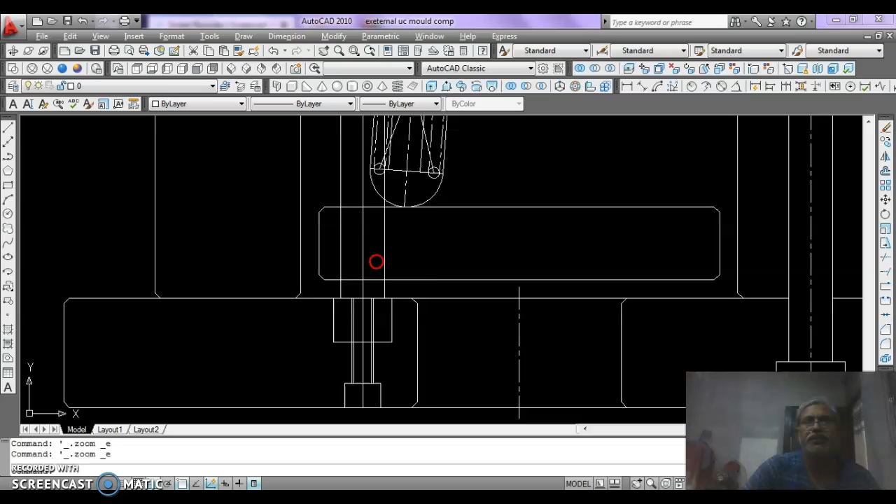Continuing our discussion on external undercut mold, we are trying the screw here to lock the ejector guide. We just trim these two lines here.

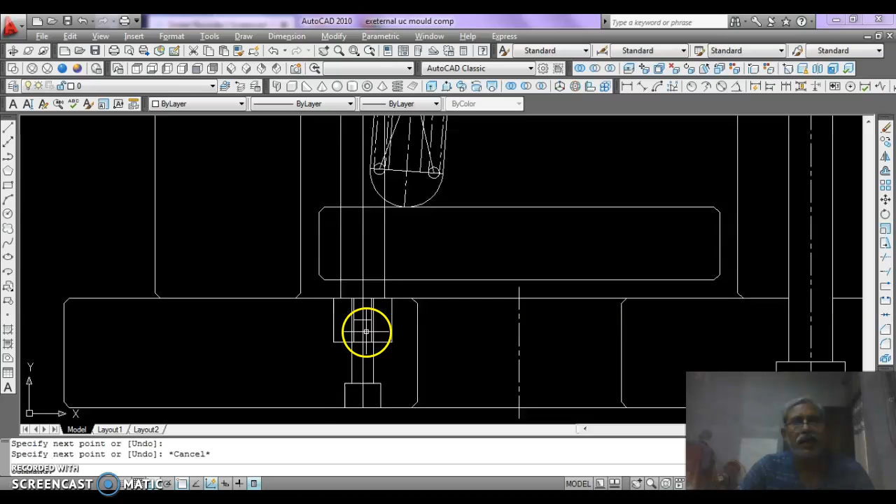Draw a line here, mid to mid, mid to mid here, and it should be moved 5 mm upward. Then F enter, sorry Control Z, F enter, R enter, 0 enter.

Use fillet between these two lines. Now offset this line by 3 mm upward, and then again F enter and draw fillets to join the corners.

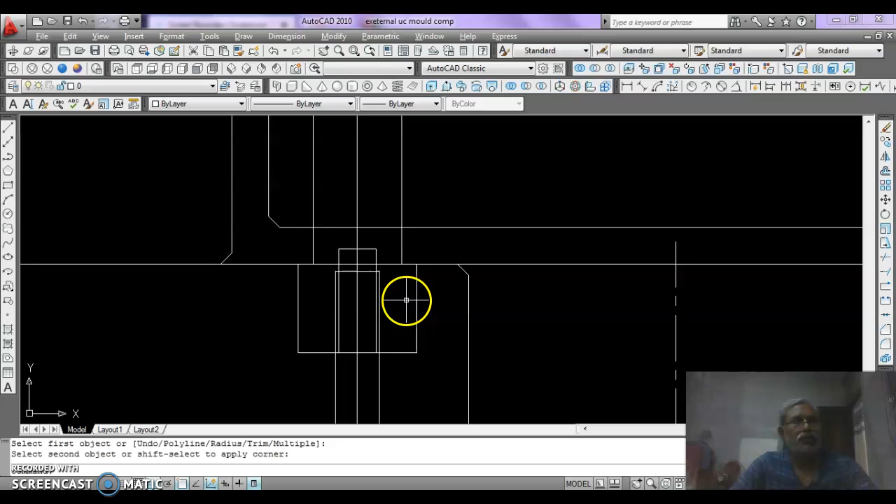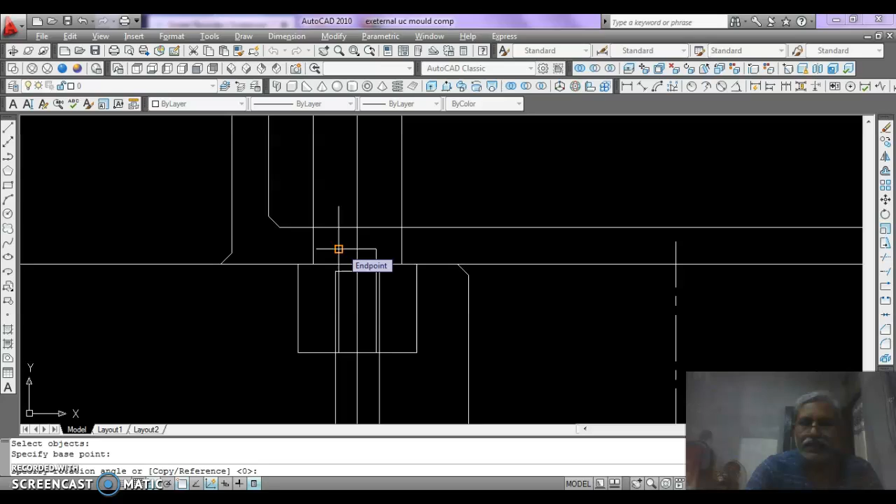Now draw a line here and rotate it by minus 39 degree, sorry, 34 degree, 64 degree.

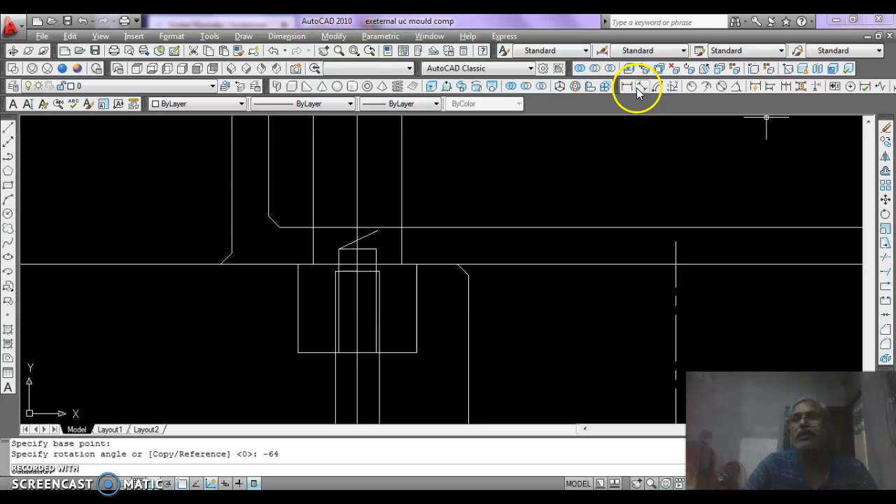As 4 degree is tilted 4 degree, we can check this, the angle should be 30. It is 26 degree here, we need 30 degree, so we rotate it again by 4 degree, and now it is 30 degree.

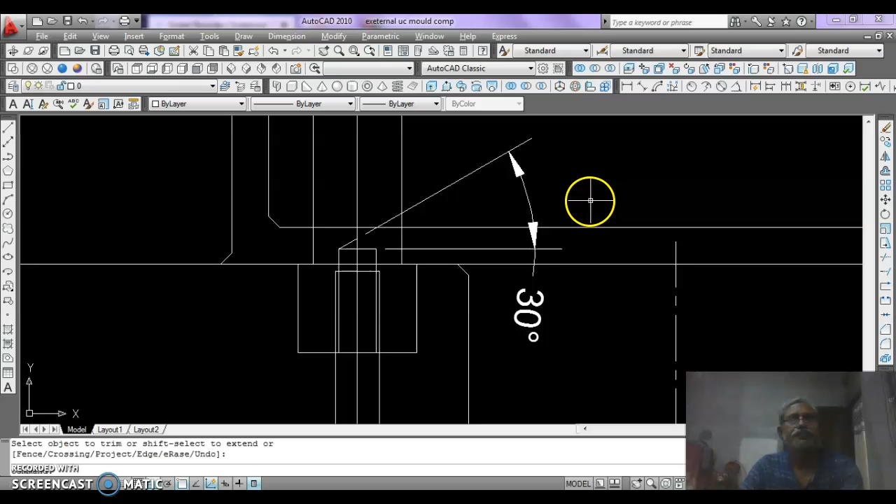Now trim the line on this center line and erase the angle. Now draw a line from end of this and end of this.

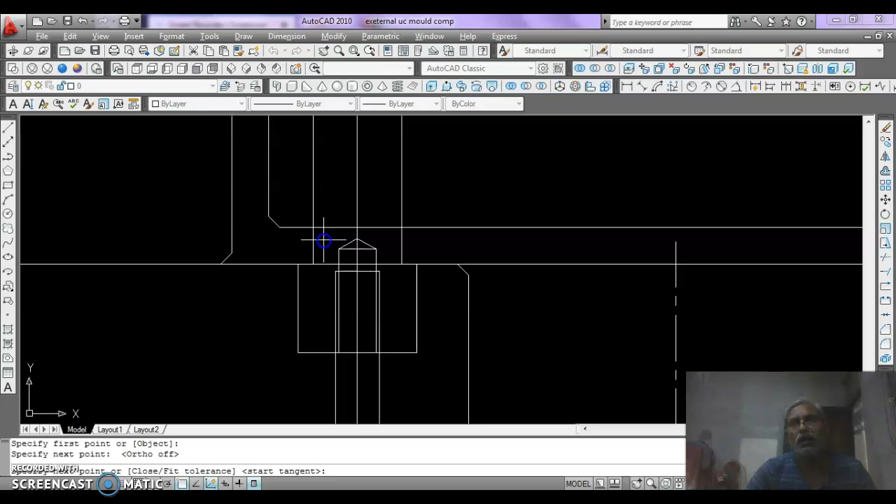Now we just draw a spline here using ortho, and then trim.

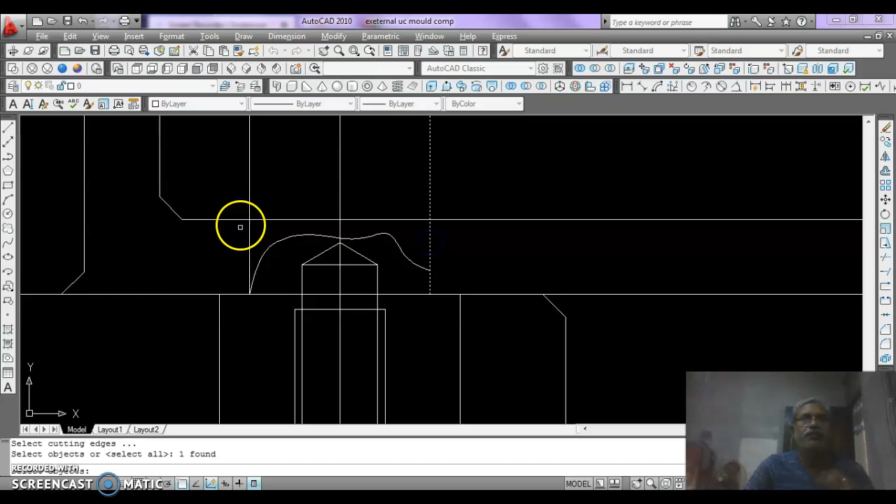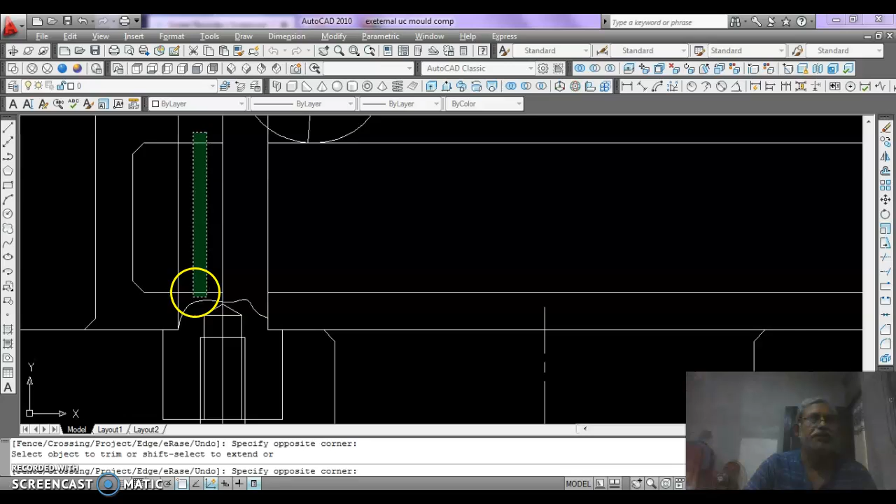On these two lines, this line. Now we can also trim these two lines and these two lines. We can also make a bush here.

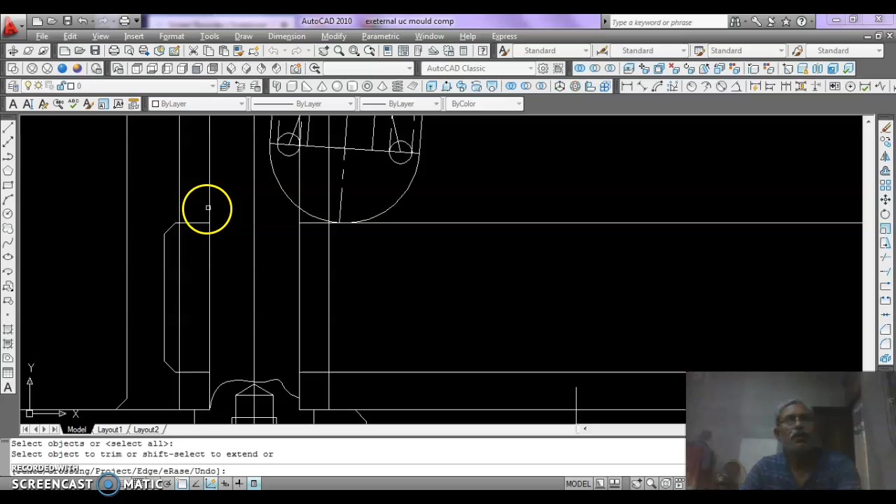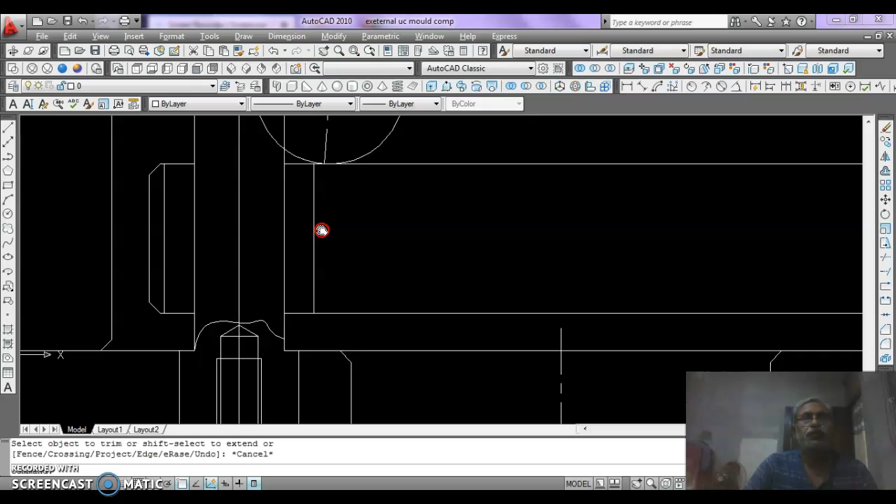Offsetting by 4 mm this line rightward and this line leftward. Trim these two lines on these two lines, this and this also. This is the bush we need to travel the ejector assembly.

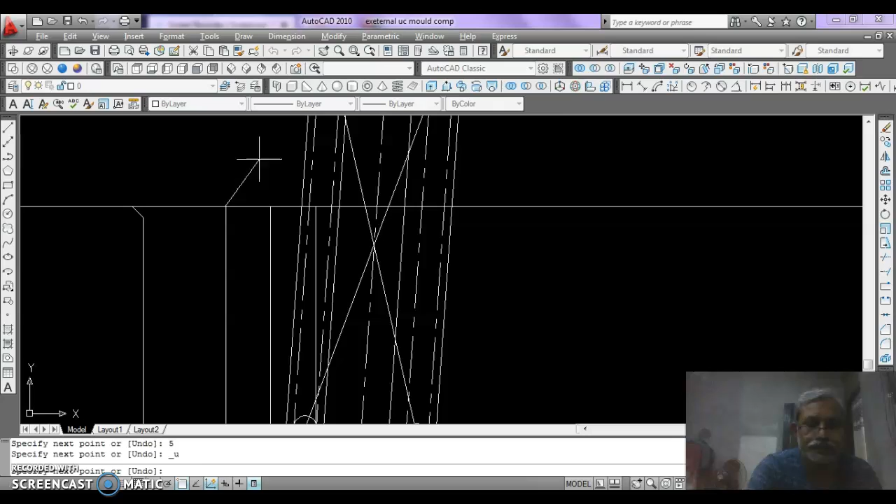With this pillar, and this pillar should be 5 mm inside, ortho should be on. Five mm and then 12 mm and then join with this.

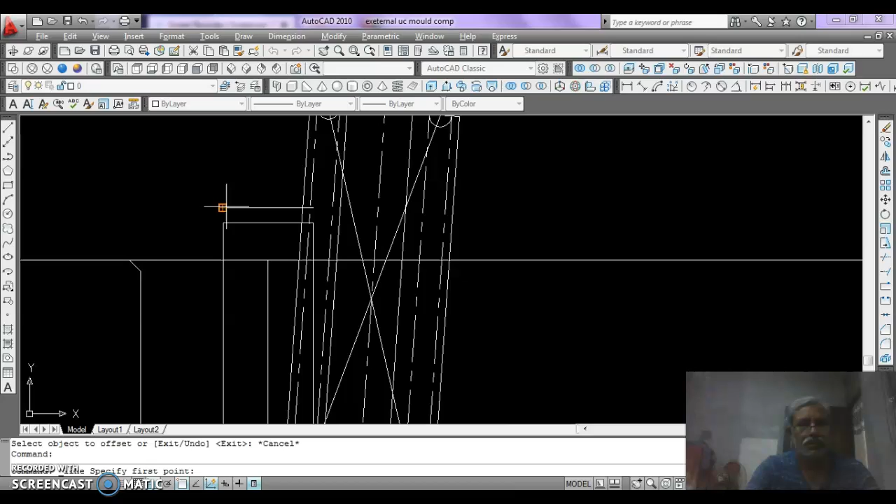Here also we need offset by 2 mm upward the depth of taper at the rate of 10 mm, angle 30 degree.

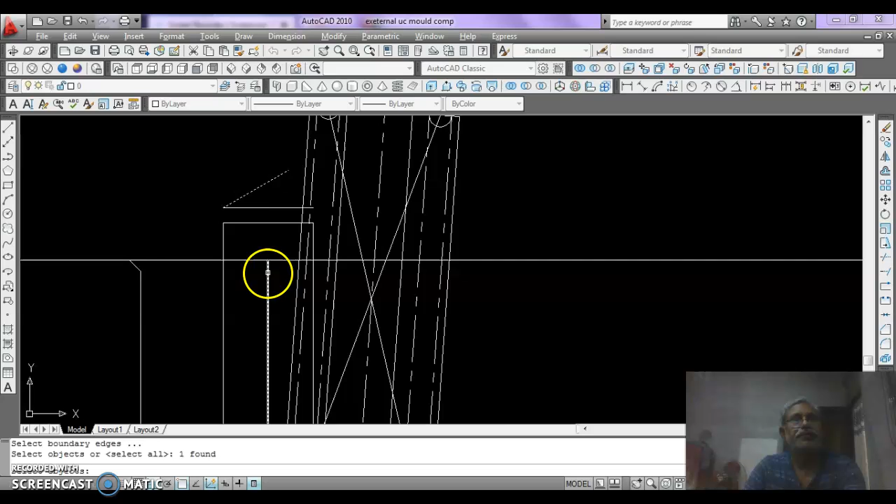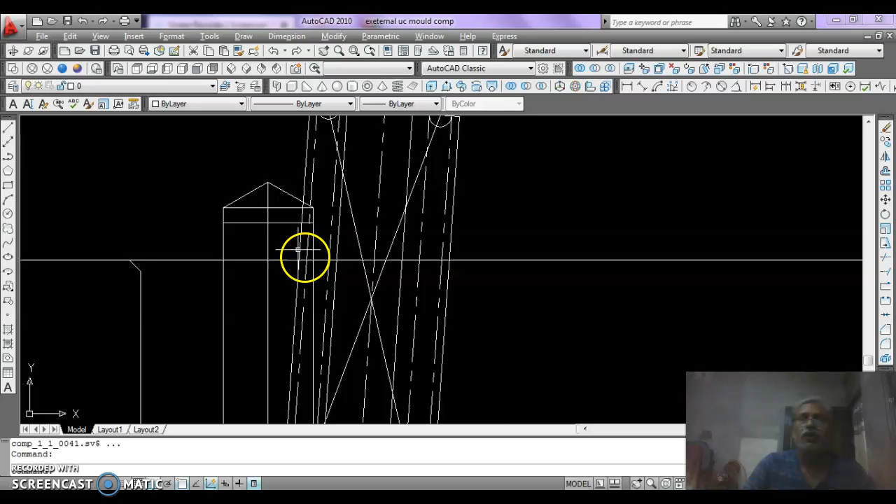And then extend this line to this line and then trim it. Now draw a line from here to here. Enter these two lines to be extended to this line, and now the pillar is fixed in between the two plates.

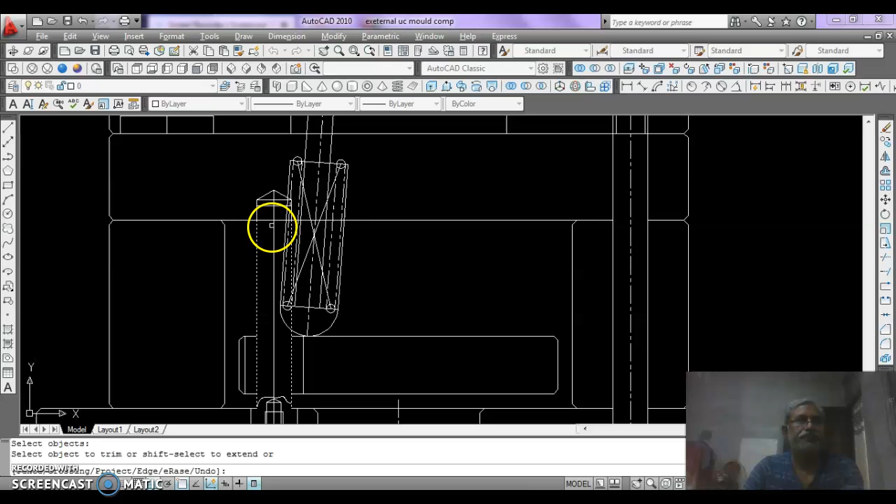This line be trimmed in between these two lines, and these are 4 pillars, so we may mirror it the whole

System in the center.

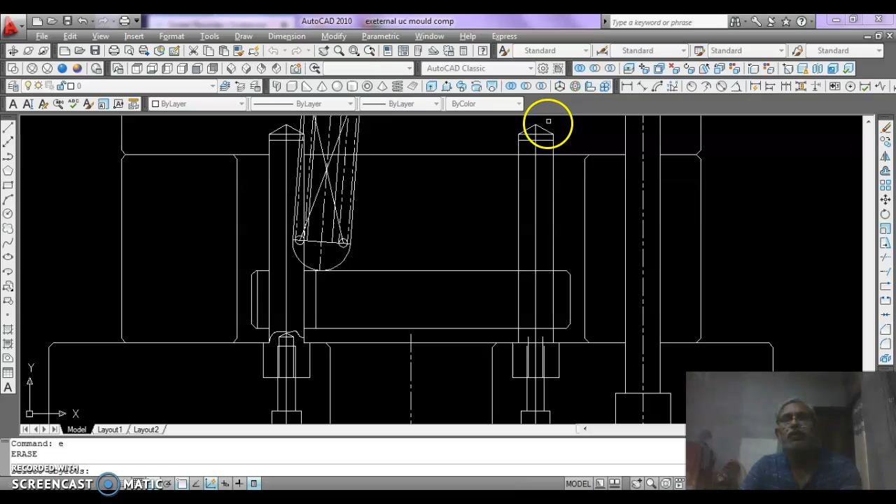And this is not visible, so may be erased, and this also not visible. We can erase this whole system except this line. This is the center line and not to be erased.

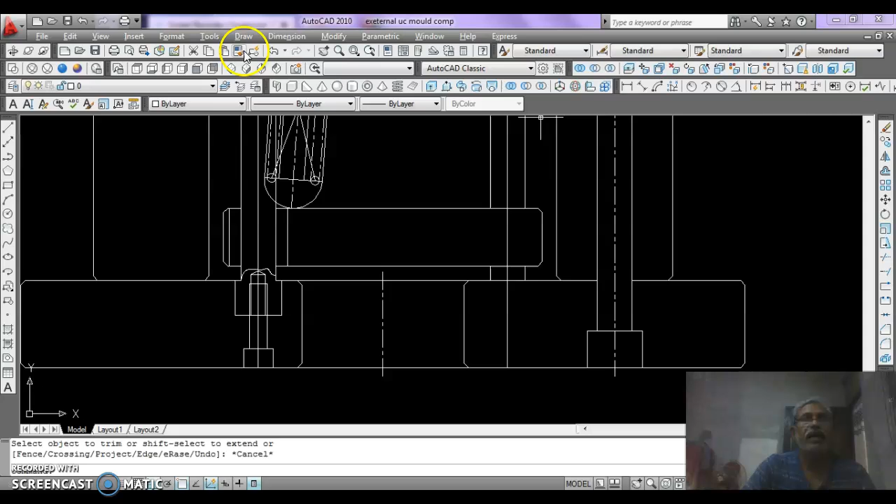Also trim this line in between two lines and match property. With the help of match property, this center line to this center line.

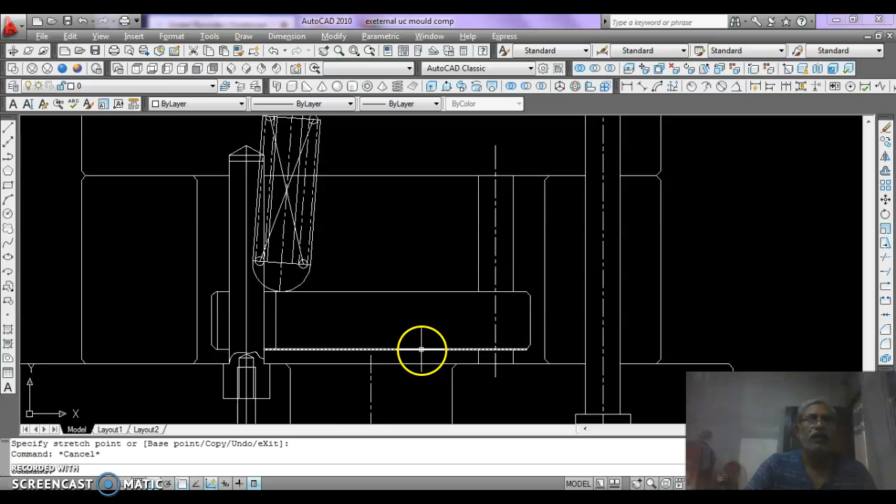Now this line we dragged close to the pin, and now the ejector assembly is running well.

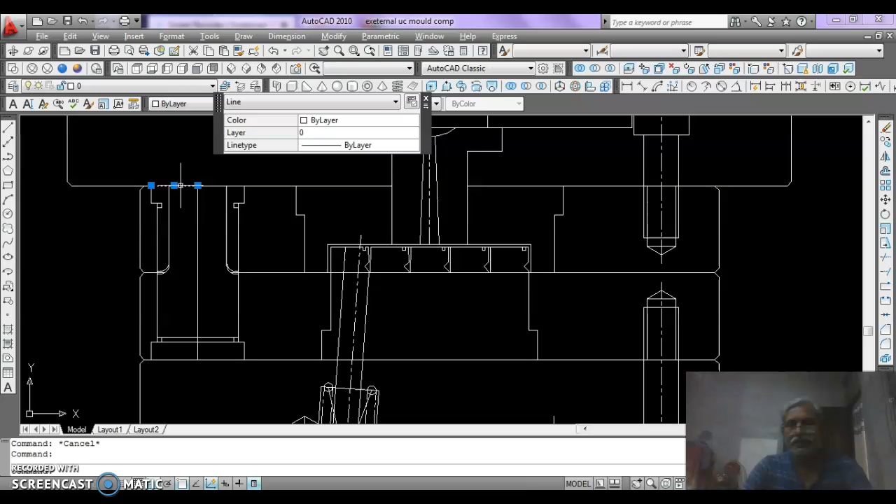Make fillet with 0 radius in between these two lines. Now draw a line. Now offset it by 8 mm downward and then draw a line at the rate of 18.

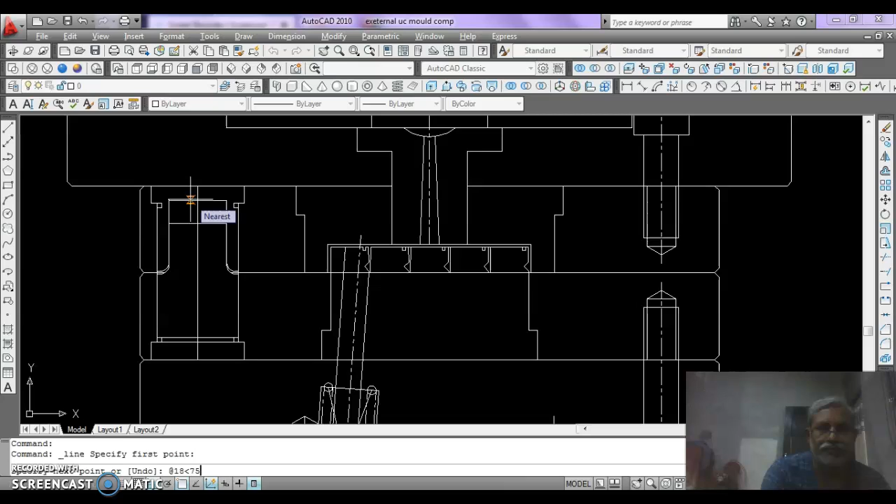Angle 30, not 30, 75, and then F enter, R enter, 2 enter. Here is the 2 mm radius, and then mirror these two

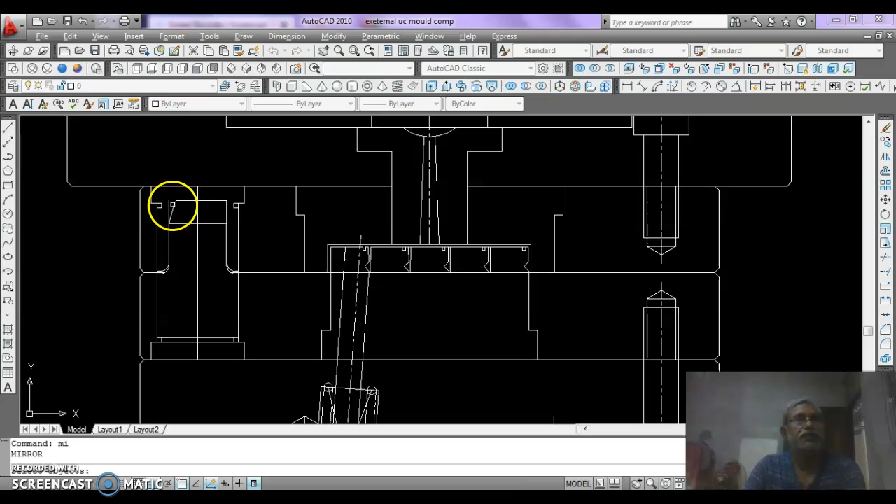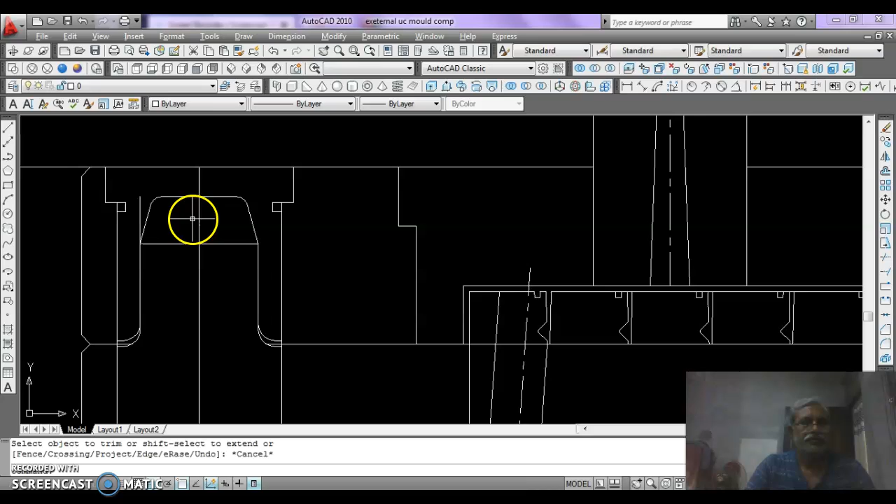At this line, and then trim. Sorry, this is not to be trimmed, this can be extended to the upper line.

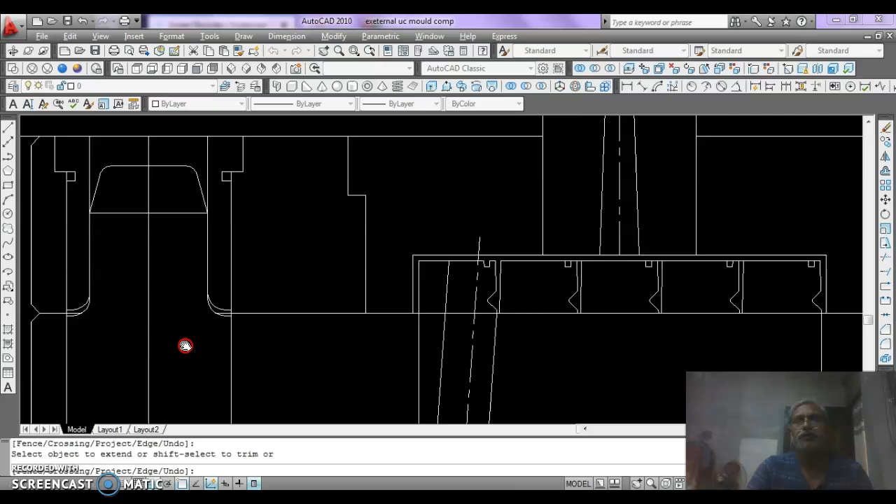Now guide pillar and guide bush is ready to work. Now here we need a

Screw at the distance of 50 and till this line, and then delete this line and draw another line here to here by 6.75.

Then 8.5, then now offset this line by 4 mm and then trim these two lines each other.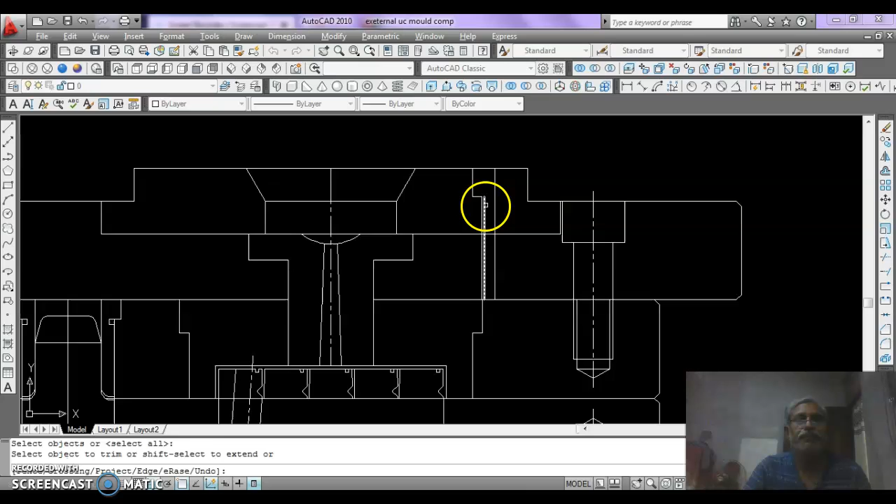As cutting edge. Now offset this line by 0.75 inside and then trim it and then mirror it another side.

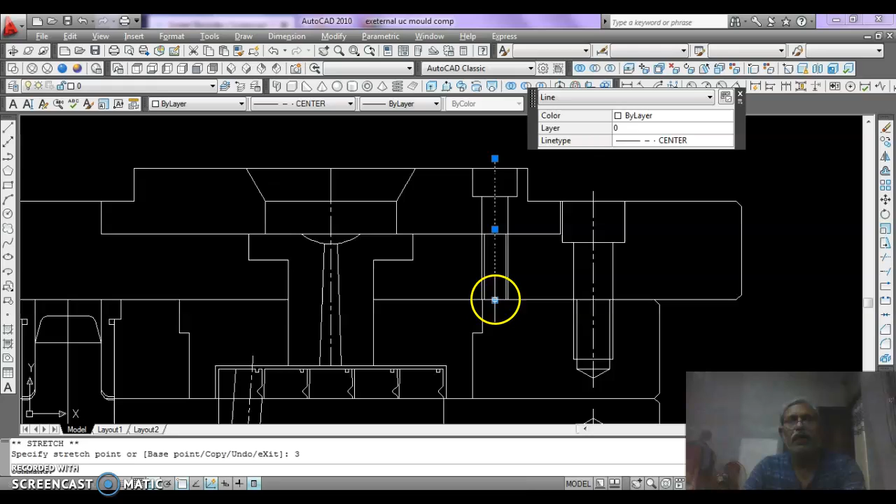Then join both these lines in single line, then match properly the center line of this screw and extend this center line by 3 mm upward and 3 mm downward. It can also be extended 3 mm upward and 3 mm downward. We can join these lines each other.

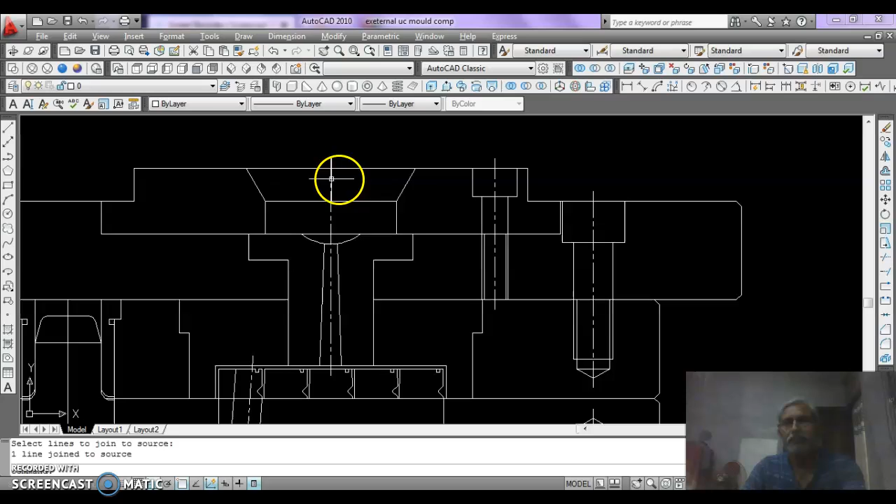Now the screw bush also ready. Now we have to go in the plan to draw this pin in the plan.

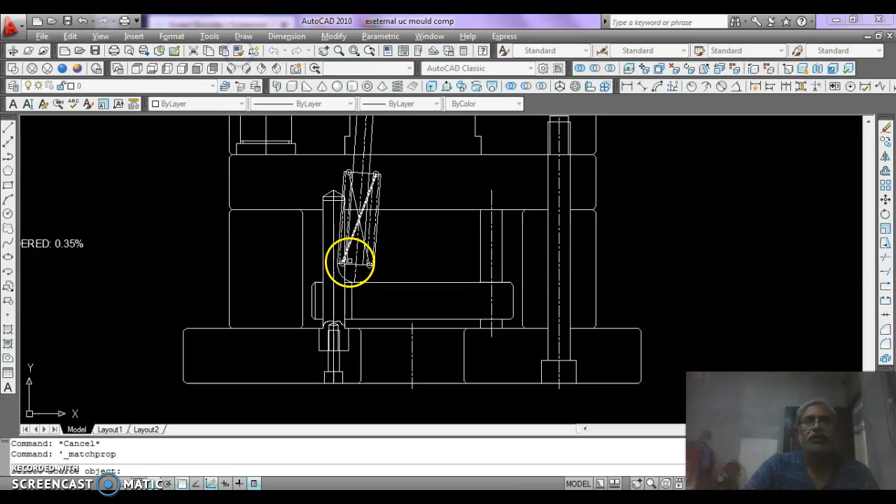These pillars also be drawn and their center line be converted into center line property. This is also, and then this can be dragged by 3 mm downward and upward.

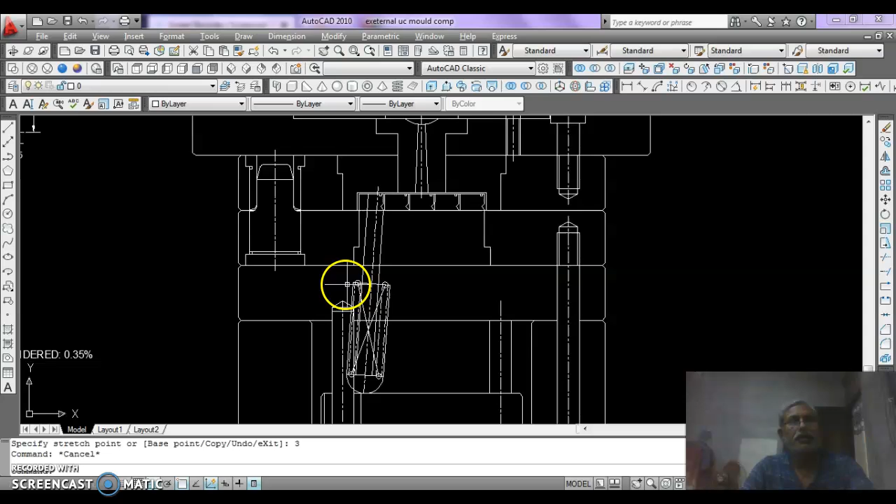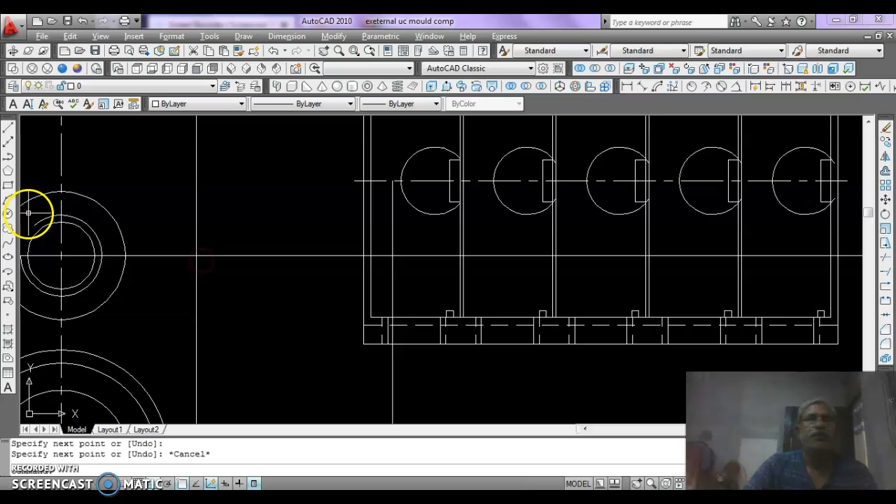Now we have to draw some line here. This is the head of this line and we have to draw an ellipse here using this center by 12 mm, 20 mm.

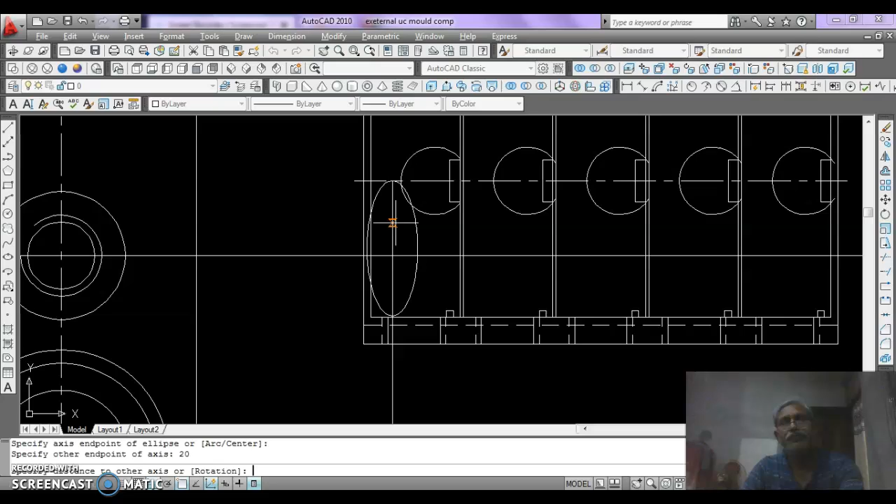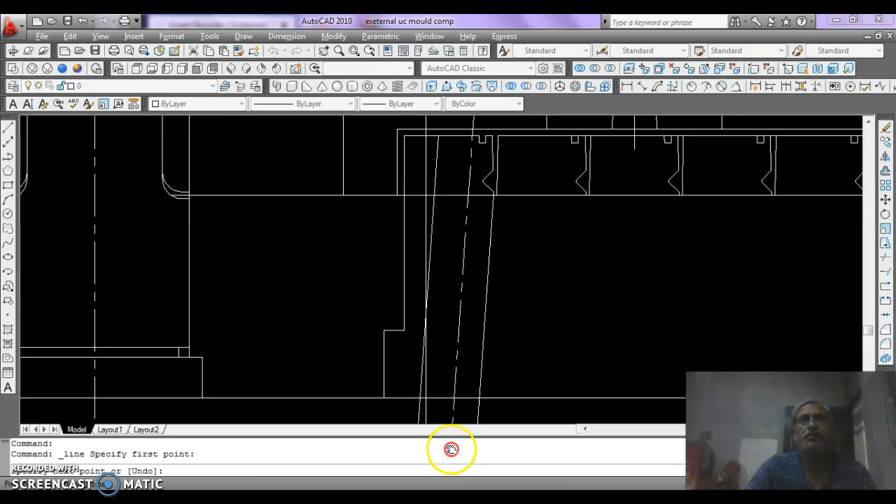And in the region of this we need some other lines just like drawn by here. Okay, now we can draw an ellipse here, from here.